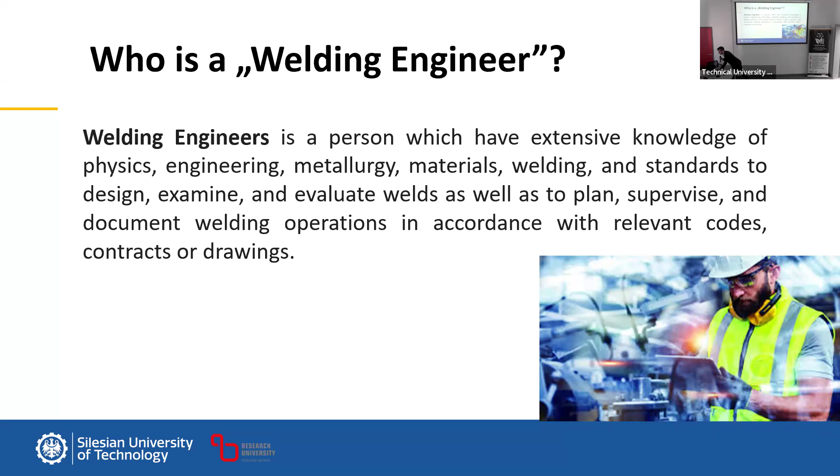So you can ask, why do we need welding engineers? Because in the ISO standard 9001, which is the standard about quality, you can find information that welding is considered a special process, which means that the quality cannot readily be verified. So what does that mean?

For example, if you have a welded sample and would like to check if it's strong enough, you need to do the tensile test. But after this test, your specimen is broken, so you don't have it anymore. And you can say, of course, I will take another specimen and weld it with the same parameters, and I should get the same result. But...

I will take another one. Okay, so maybe your specimen is broken, and you can say you'll do another one with the same parameters and you're going to get the same result. But the process of welding has so many variables that we cannot ensure a second specimen done with the same parameters will have the same quality. Its successful application requires specialist management, personnel, and procedures. That's why we need welding engineers.

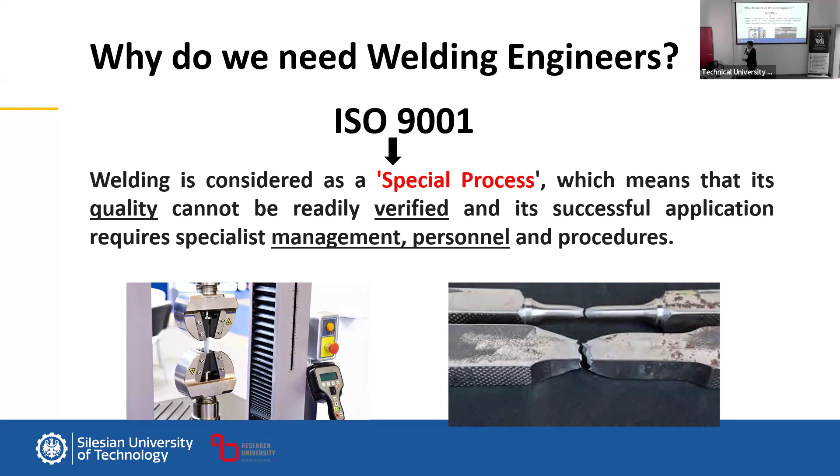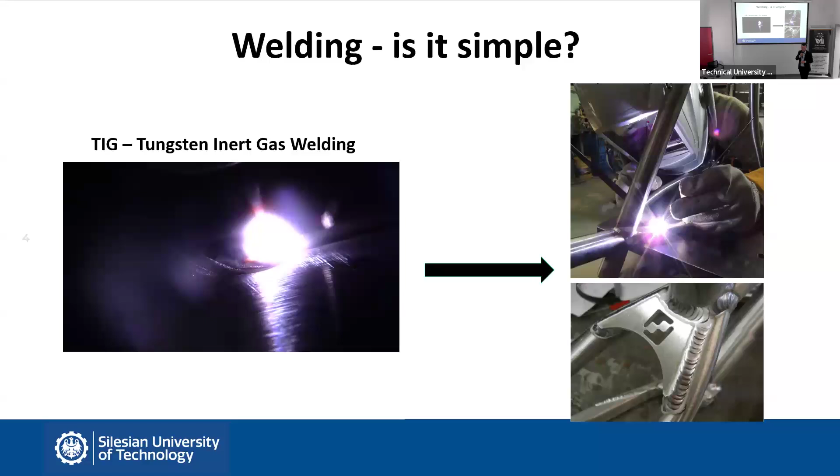So, okay, other technologies of welding. A very popular method is shielded metal arc welding, where you use a rod covered with special materials that, during welding, forms a slag which protects us from oxygen, from air, and things like that. That's a very simple and very cheap method of welding.

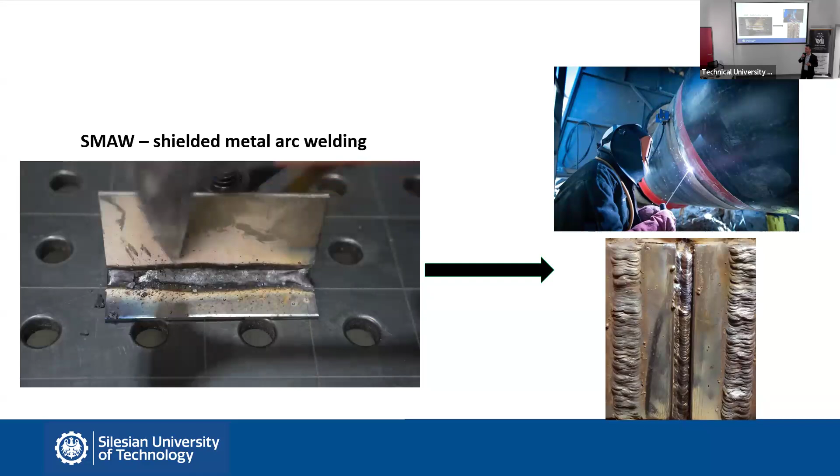So that's why this method of welding is very popular for home use. And the weld, as you can see on the right side, looking not so good, as the tungsten inert gas welding method.

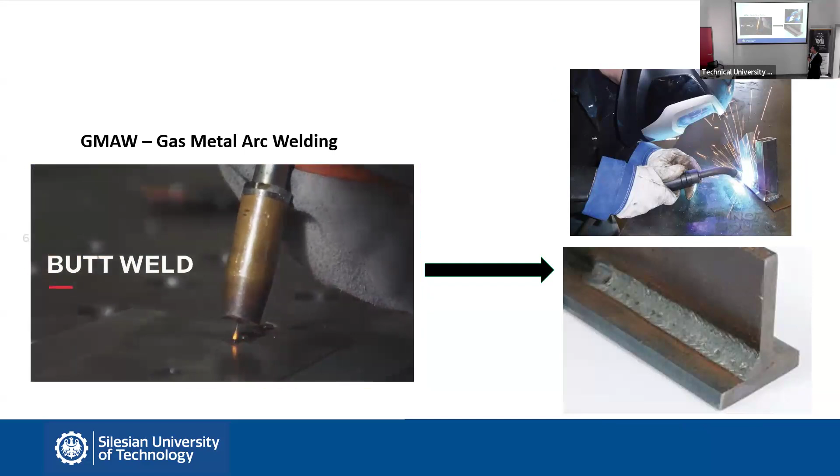One of the most popular in the industry technology of welding is gas metal arc welding, where this method is semi-automated because the wire is automatically given to the welding place. So this method is very efficient and very often used in industry.

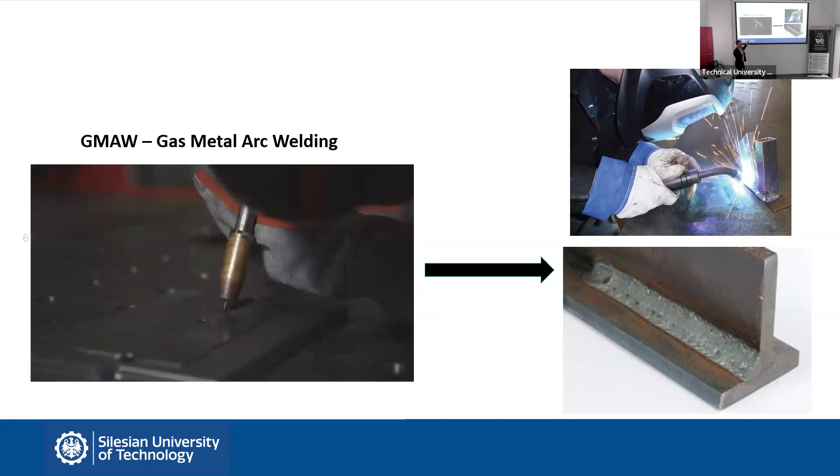So first of all, we have a lot of technologies. These are one of the simplest technologies, but we also have very, let's say, sophisticated technologies of welding, for example electron beam welding.

But using electron beam welding, you can do it in one pass. So you can save much more energy, you can be more ecologically friendly, and also economically friendly.

So another method of joining materials together is explosive welding, where you are using explosive materials to join together two different materials which we cannot join together in the normal welding process, where we are heating material to its melting temperature.

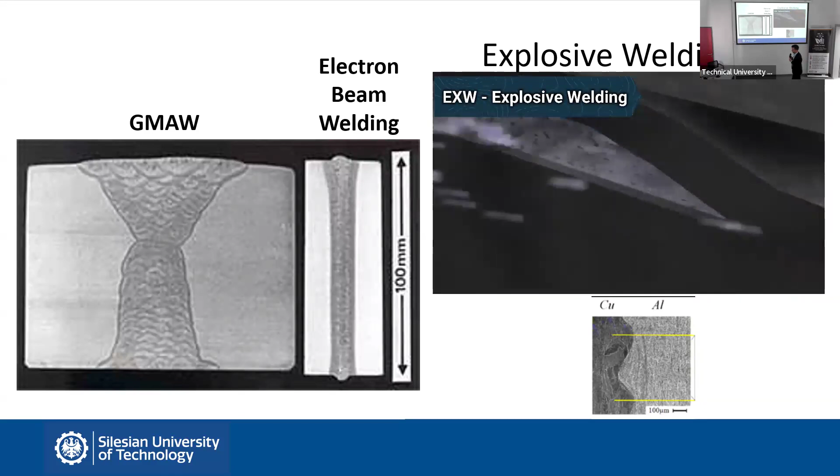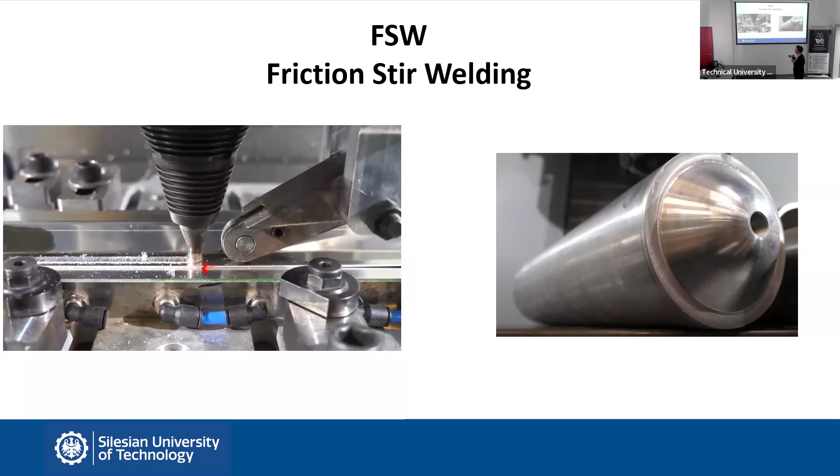So the last method I would like to show you today is friction stir welding, where we are using friction and pressure to bring material to its plastic form, to deform plastic material and mix it together and join the material. So we are not heating material to very high temperature, we are getting material to its plastic form.

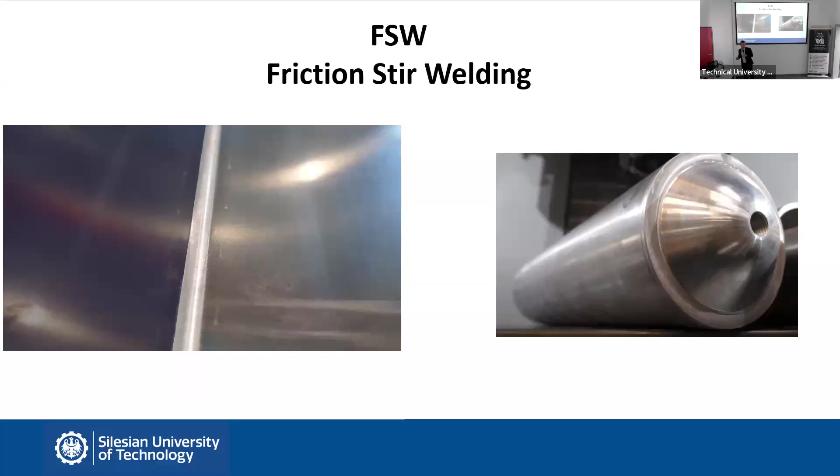And for example, we can make tanks using this method. It's a very expensive method of joining materials together, so it will be mostly used in the aerospace industry and things like that.

So that was about the technology, but we also need to know that we have a lot of different materials that we need to weld. For example, if we have low carbon steels, we know how to weld this, but you can mix this steel with chromium and nickel and have stainless steel.

We have aluminum, which is very commonly mixed with magnesium, and then you get a very good alloy which is used in the aerospace industry, for example. Copper mixed with tin gives us bronze.

Titanium, which is very often mixed with aluminum, and we can get some grades of titanium. Or cobalt, which is mixed with chromium, can give us other alloys like stellite materials and things like that.

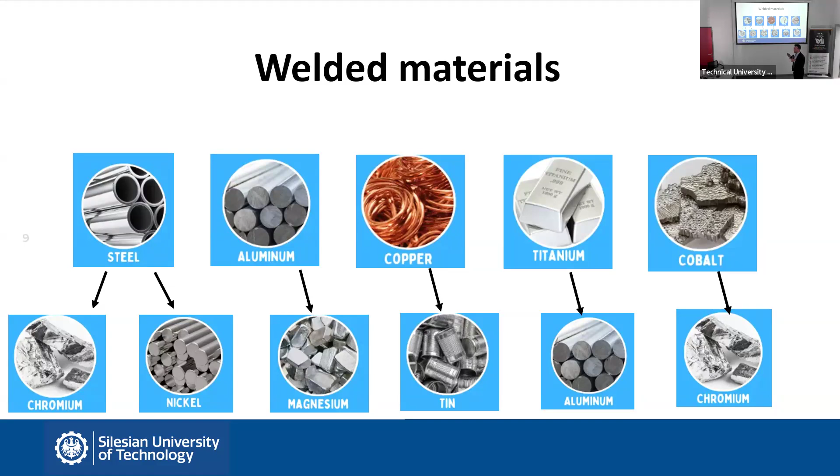So what I wanted to show is that we have a lot of different materials, and those different materials must be welded by different welding technology. It's very important for welding engineers to have this knowledge.

So let's focus on cars, because cars we have everywhere. Modern cars are built from many different materials. For example, cars have aluminum casting, steel, composites, aluminum sheets, magnesium, aluminum extrusions.

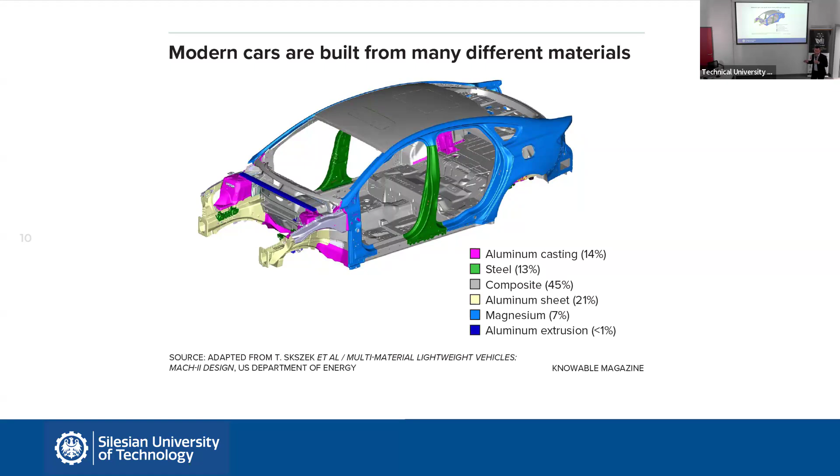And why do we need so many different steels in the car? Because some parts of the car need to absorb energy during an impact, so they cannot be too strong. And some of them need to be very strong so that during impact they wouldn't plastically deform, like the safety cage in the car.

And all of this material will be welded with different methods. For example, if we have high-strength steel that we know is maybe martensitic steel, then we know that we should maybe preheat the material before welding, because otherwise we could get cold cracks or things like that.

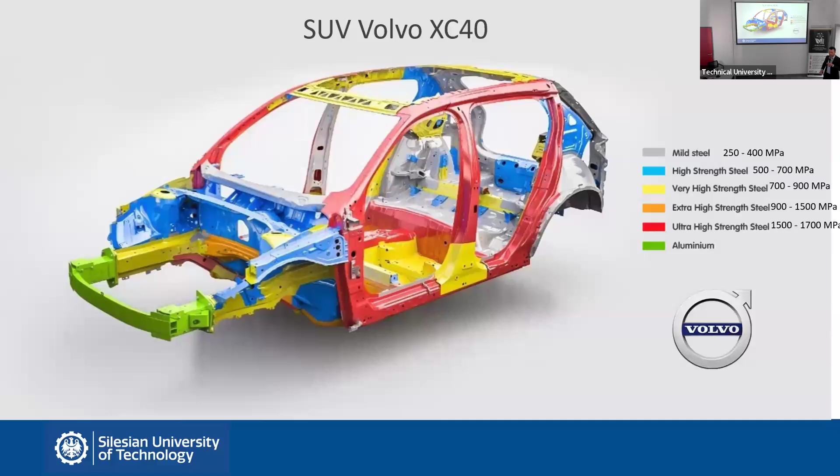But we also know that if we weld the ultra-high-strength steels with the impact of high energy during welding, we can lose these material properties. So the linear energy should be very, very low. So the welding engineer needs this knowledge about what can happen to the material.

For example, if you are having martensitic steel, you know that if you wouldn't preheat the material, you can have cold cracks, as the level of hydrogen will be too high.

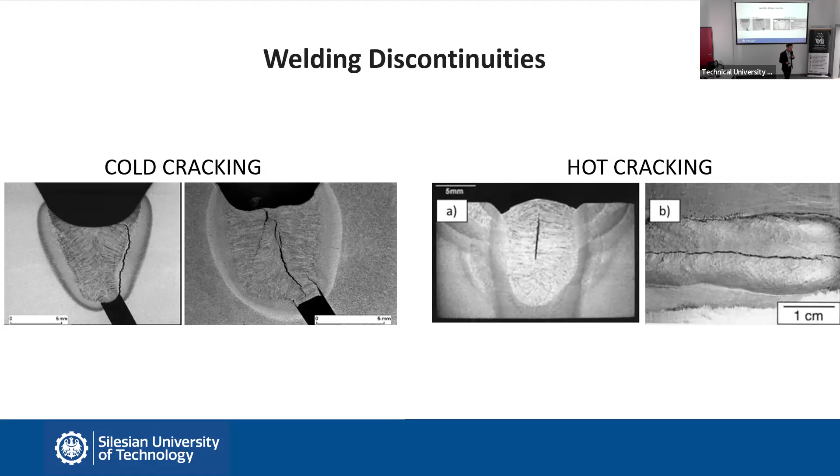Hot cracking, which is very popular in stainless steel or aluminum alloys, happens if you put too much heat into the material, due to impurities that could be in the material.

Porosity happens when you wouldn't clean the material before welding, or the gas flow rate will be too high, and the cooling temperature will be also too high. Or lack of fusion, where linear energy will be too low and you wouldn't melt the material, or there are impurities or not clean surface.

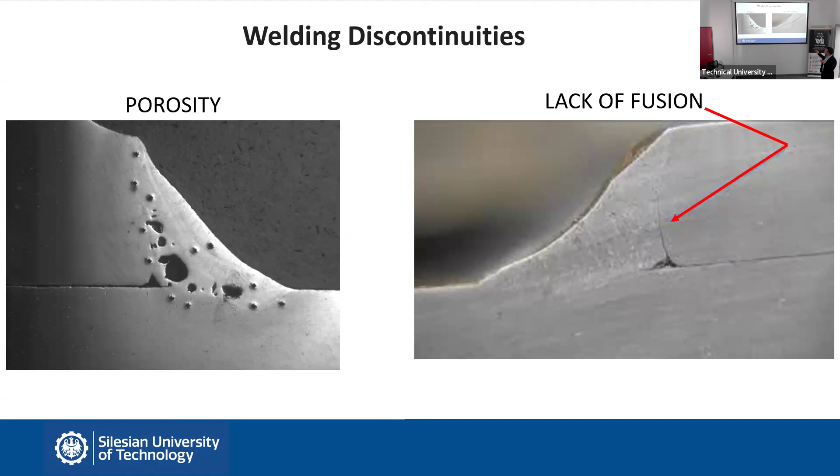So the welding engineer is the responsible person for writing the welding procedure specification. It's a document in accordance with ISO 15609, and he needs to write this document. It's an instruction for welders on how to do the whole joint.

In this instruction, welding engineers write how to prepare the material before welding, what should be the bevel angle, how many passes he should do during welding, what should be the current intensity during welding, arc voltage, travel speed, welding energy, preheat temperature — it's the whole instruction step by step, how he should do this joint if he wants to have good quality welds.

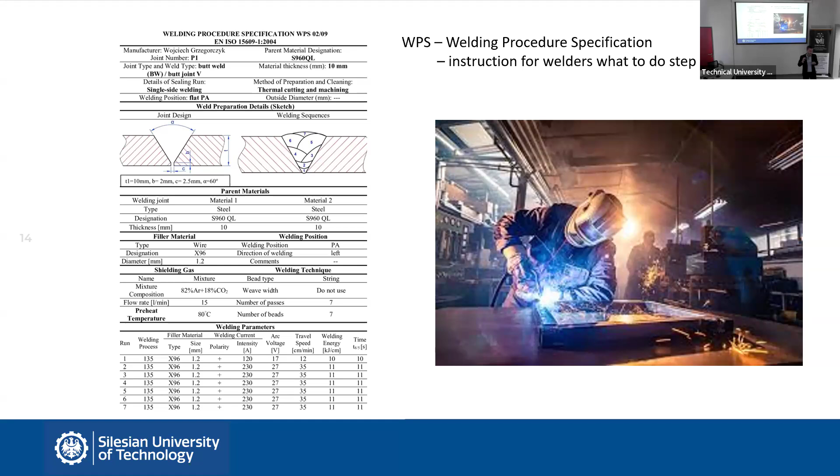And it's very important that you have a welding engineer with this kind of knowledge. So welding engineers also use non-destructive testing to test if those joints are meeting their requirements.

For example, we have penetrant testing, when we are using the penetrant. Penetrant is some kind of liquid that goes into these discontinuities. After this process of penetrant, you put the developer on the surface. It's some kind of chalk, and you can see if on your joints there are any imperfections like that.

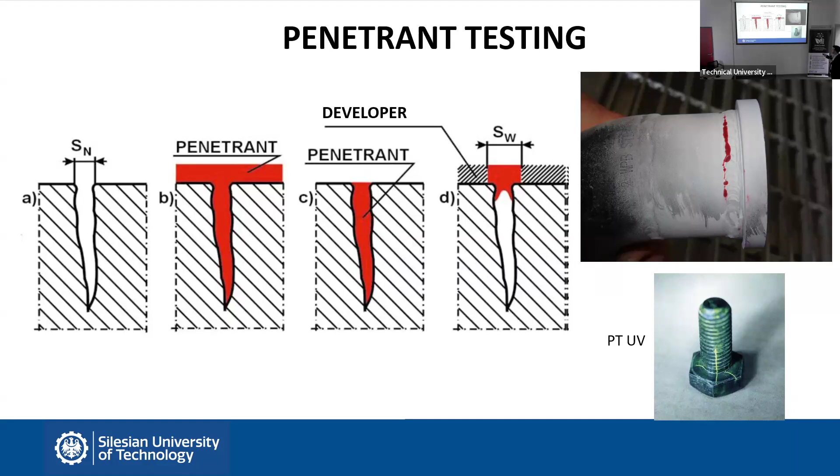We also have the ultraviolet version of penetrant testing, and here you can see the cracks on the bolt. Or magnetic particle testing, where we only test ferromagnetic materials, and during the testing we are looking for the disturbance of the magnetic field, and we can see the imperfection in UV light or in the colored observation technique, as we can see here.

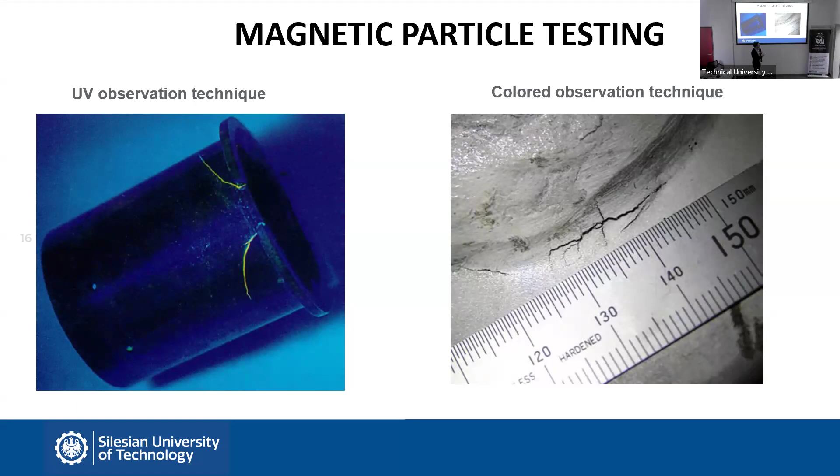Also, in our welding world, we have ultrasonic testing. This method is taken from medicine, as are a lot of different NDT testing methods. We use high-frequency sound waves, and during the testing, if there are any discontinuities in the material, you will have a reflection from the discontinuities, and you will see this on the control panel.

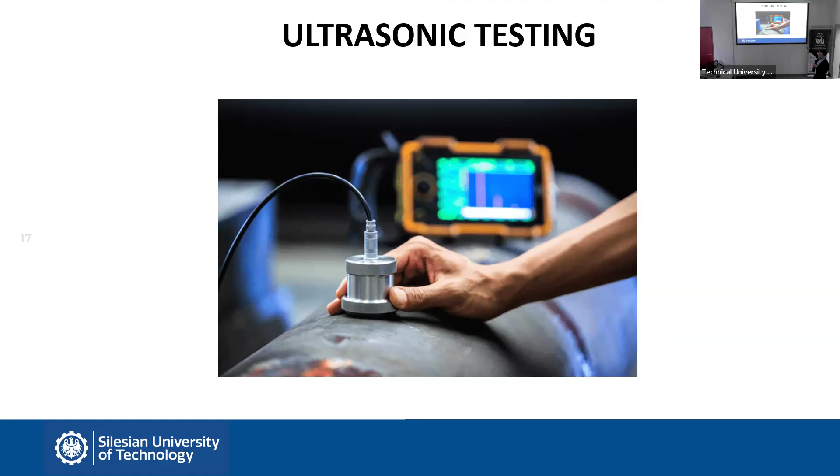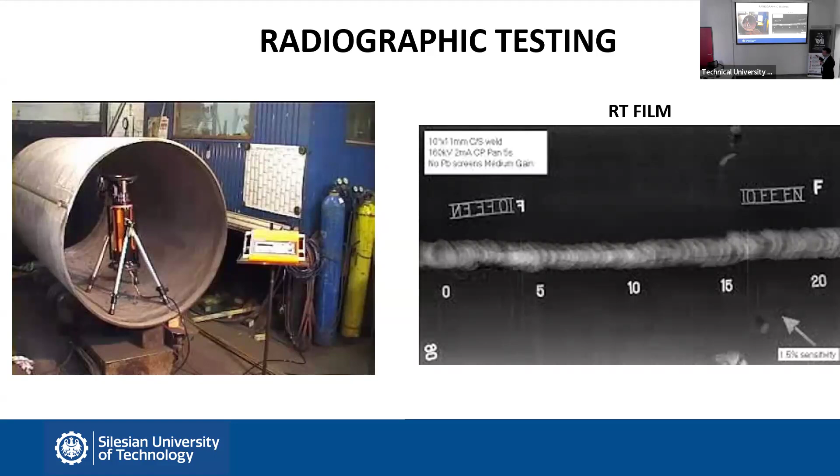Or radiographic testing, where we use X-raying of the metal material, and we can see what's inside the weld, if there are any imperfections like porosity, lack of fusion, and things like that.

So summarizing this, the task of the welding engineer is to define the welding requirements. For example, which material I will be welding, how to prepare the material before welding, how to prepare the bevel angle before welding, selecting the welding method — if I will be using tungsten inert gas welding, friction stir welding, or other methods.

We also have this knowledge of which different types of processes impact the material and its properties, or developing the welding parameters such as current, voltage, traveling speed, gas flow rate, and things like that. Some materials also need pre-weld or post-weld treatments.

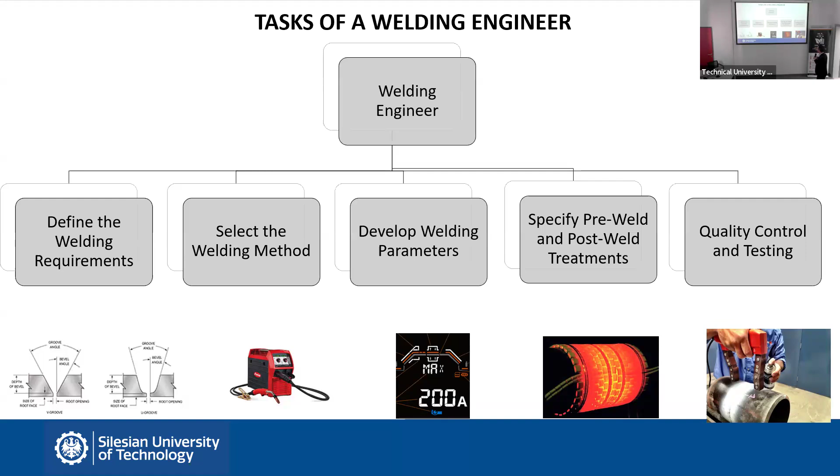Due to the fact that some materials, after welding, have very high stresses inside, we use post-weld treatments to reduce them. Or quality control and testing, so by which method we should examine our welds — it could be visual testing, magnetic particle testing, or ultrasonic testing.

So in our welding world, we have the title of International Welding Engineer. It's the highest qualification issued by the International Institute of Welding. But you can say, why do I need in my company a person with this title? Because they are required by the standards.

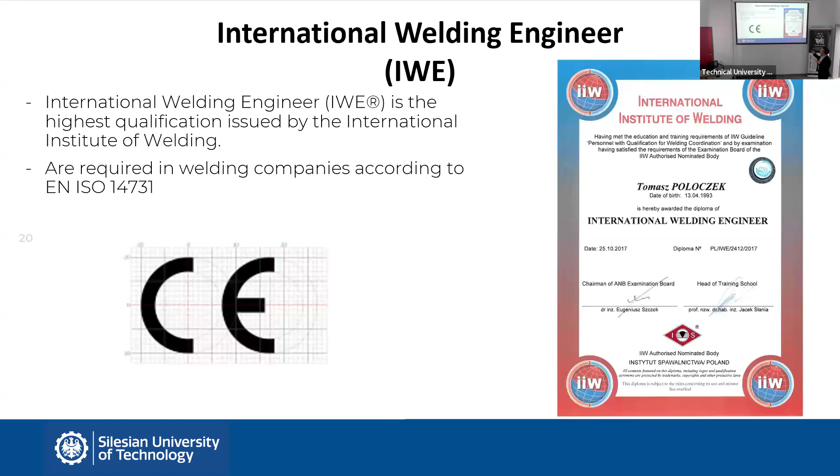For example, if you want to do building construction, and you have welds there, if you want to give the CE sign that you are meeting the requirements about safety and all these kinds of things, you need to have in your welding company an engineer with those qualifications, with International Welding Engineer qualification. So it's needed by law, let's say. So how to become an International Welding Engineer?

So first of all, you need to graduate higher educational studies, completed with a diploma thesis in the field of mechanics, shipbuilding, metallurgy, materials engineering, electrical engineering, civil and water engineering, or chemical engineering.

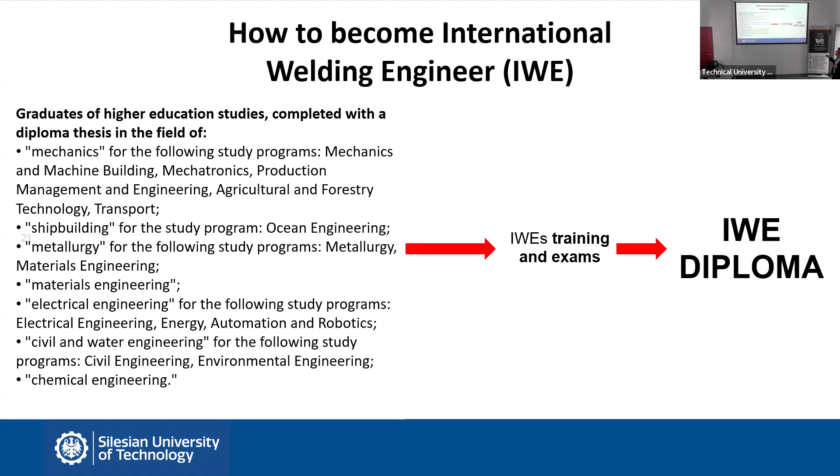After this, you go under the IWE training, which lasts about 1 year, with a full week in the month for that year. After this 1 year, you have the exams, which last about 3-4 days. And if you pass them, you get the International Welding Engineer diploma.

So I checked, and in Greece there are three examination centers. One is in Elefsina, near Athens. One is in Thessaloniki, and one is in Kozani at the University of Western Macedonia. There are only three places where you can get this title, so if you'd like to become a welding engineer, you pass this exam in those institutes.

For example, in Poland, we only have one place, located near the Silesian University of Technology, in the same town. So all Polish welding engineers need to do the final exam in this one place only. There are no other options.

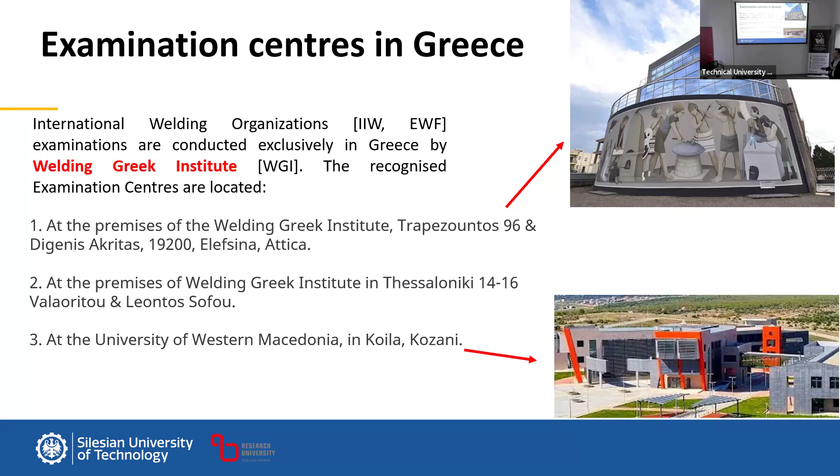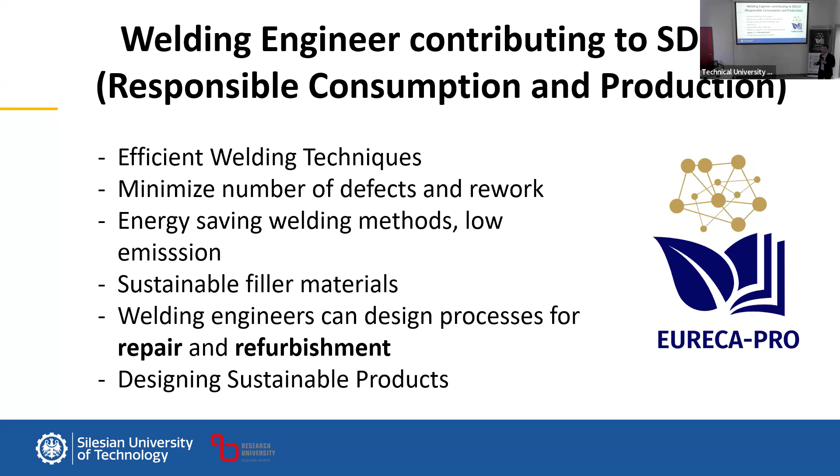And we can also design sustainable products, using for example materials characterized by high erosion resistance, tribology resistance, or corrosion resistance. For example, for corrosion resistance, it would be nickel alloys.